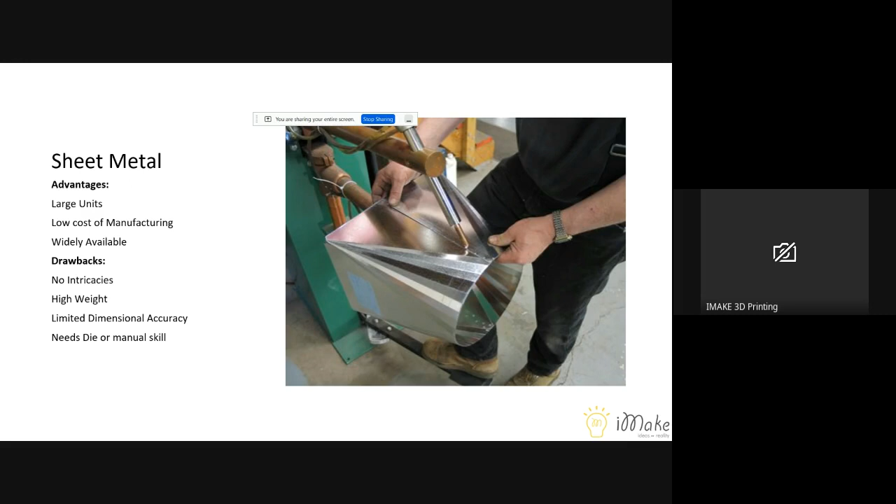Just to give you a very brief idea, to make a detailed sheet metal part you would need a punch and die, and that would typically have a pretty long lead time. Unless you really have large scale volume, it doesn't make sense to go for a sheet metal die punch. Sheet metal, forming, or even deep draws: many of you must have used metal bottles these days. They are deep drawn, made primarily using sheet metal.

And then you have CNC. It has very high accuracy. All of your watch components are mostly machined or done using CNCs. Metals, woods, and plastics can be done. The repeatability is pretty high, as in the first part and the 10,000th part will have the same kind of accuracy.

Your MacBooks are machined, the outside rim of your Apple iPhones is machined, and the majority of internal components in your watches or the engine heads in your vehicles are also machined. It is expensive even for mass production; unless you have very high volumes, it doesn't make sense to get it done through CNC machining, and the lead time is pretty high.

To get a medium complexity unit, the normal market time at the moment is anywhere between 6 to 12 weeks. In the current fast-paced environment, people don't have that kind of time, the reason being that product lives themselves have shrunk.

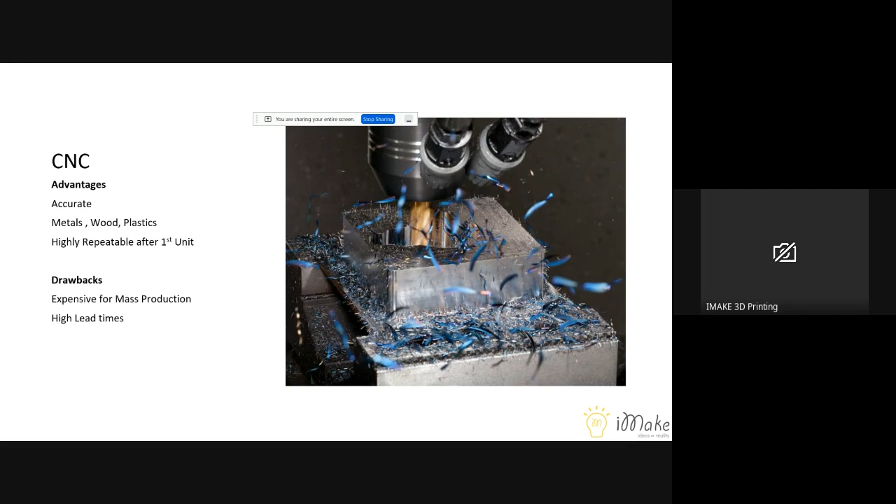I mean, most people these days don't use the same phone for more than 2 years. They don't use the same laptop for more than 4 or 5 years. The car is changing every 4 or 5 years. Now, if you add 6 months or 1 year of product development in the life cycle of the product, then the companies would lose a lot of time. So they will have to do things in parallel or invent new ways to deliver and reach the market faster than normal.

And then you have sand casting, which is also a very old method. Many of your large metal statues, some parts of your large jewelry, or even some components in automotive are normally sand casted. Like your base, the chassis is sometimes sand casted, mostly. Sometimes they're investment casted, sometimes they're laser cut, but there will always be a combination. So the advantage is you can do it in much smaller batches.

And by the way, railway components largely are sand casted. Many railway components are done in Hyderabad as well. If you go to the Medak area, there's a huge number of companies which do sand casting. The surface finish and the porosity are often a problem, and the initial pattern is still required, but the lead time is relatively faster because you're making it like a copy.

So you have an original part, you do it in wood or you do it with 3D printing, and then you make a copy of that. So the quicker way to do it in metal is sand casting. You can shrink it down to a 1 week kind of lead time.

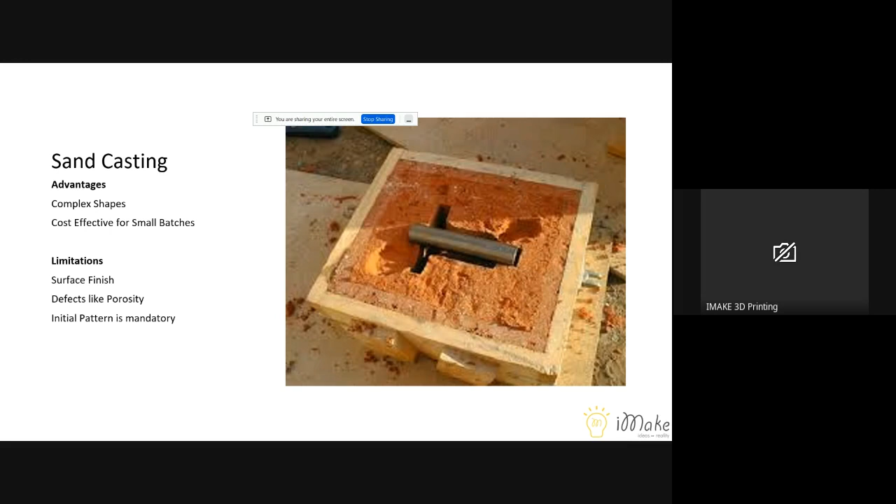And by the way, please don't hesitate to stop me at any point of time. And also, I'm not from a teaching background, so I would not be a good teacher. So please stop me if I'm going too fast or too slow.

And investment casting these days, okay, just to make it fun, how many women are there in the audience? Just to make it interactive, because I don't see people reacting. So how many women are there in the group? Approximately half of them. Hello. Yeah, we raised the hand. We are raising the hand, sir. Oh, you raised the hand? Oh, okay. Where do I see that? I'm new to this. Oh yeah, now I can see. All right, so good number. Okay, good.

So a tip for you: next time you go to buy jewelry, if the jeweler says that it is handmade, he's talking nonsense. He's just trying to trick you. 90% or 95% of the jewelry made currently is entirely made using investment casting, and the primary part is made using 3D printing. I've seen a couple of jewelry manufacturers in Mumbai and in Ahmedabad. They literally make thousands of models every single day. And the production cost in jewelry has actually come down after using 3D printing.

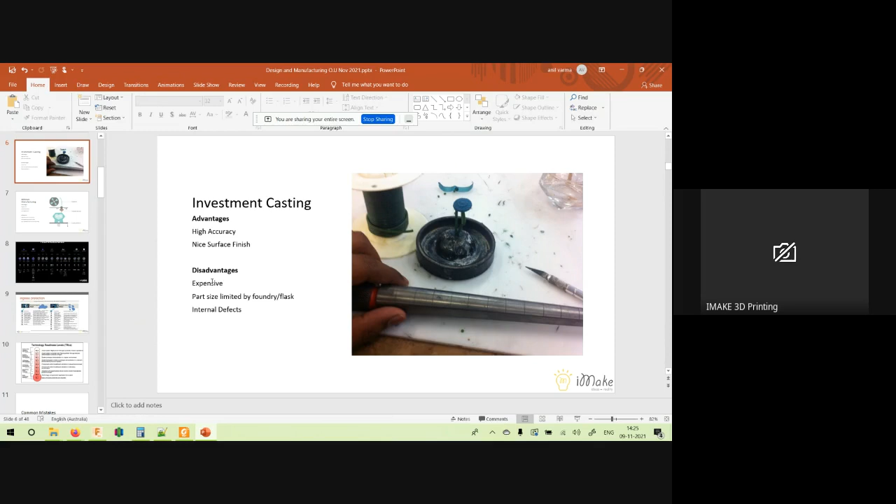And also, just to give you a reference, we do a lot of work for the Telugu film industry and a little bit for the Tamil and Hindi film industry as well. Much of the custom jewelry that they wear is also done using investment casting. And before investment casting, for example, the blue part that you're seeing where I'm pointing, this part is 3D printed.

And it's a very economical and very fast method: you design the part, you 3D print it, and then you make it using investment casting. In this case, I did only a single part because it was the first part. But typically in a single tree, you can make about 60 or 70 such pendants or rings in one single go. So this is used in different places. These are called motifs. So yeah, all right.

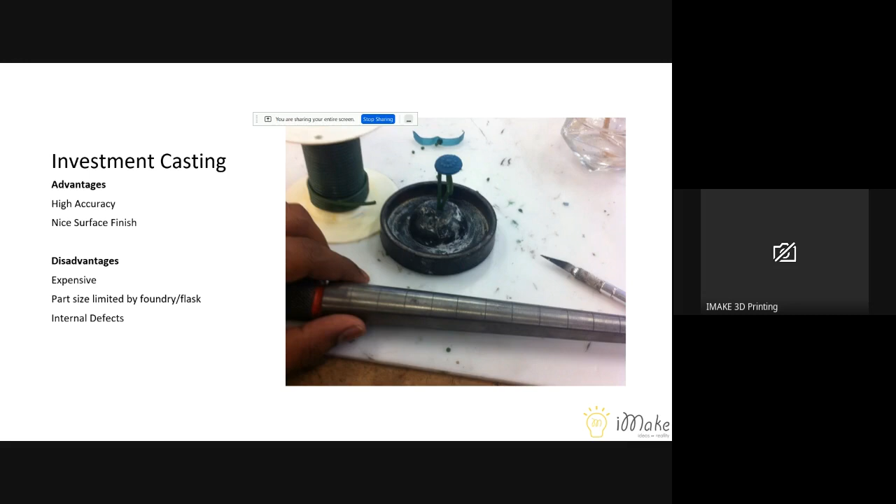And then you also have injection molding, which I'm sure most of the people must have seen, I'm assuming. And then you have additive manufacturing. Obviously you can do a single unit. For example, if you have 50 different designs to be made in a single go in a single 3D printer, you can do all 50 at a time.

And that is how 3D printing has been helpful for medical and jewelry, because it is many times customized and the orders are not bulk. And one more business advantage that 3D printing has given to the jewelry industry or medical industry is they don't have to maintain huge stocks. Because of the short turnaround times, the parts are made on order, and within a week you will get your part.

I mean, many of you must have used or heard of these dental implants or knee implants. Knee implants are nowadays being mass manufactured, but dental implants largely, if there is a crown or a custom thing, are being 3D printed using various metals. These are the two industries which made maximum utilization of 3D printing.

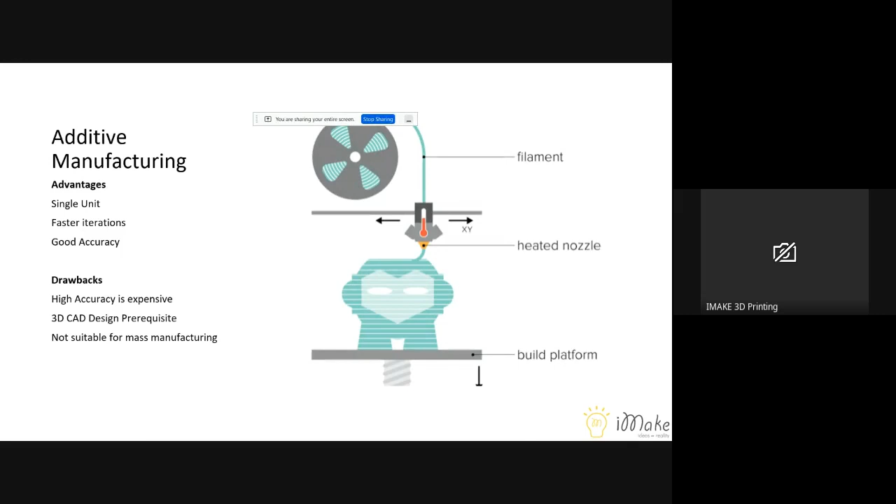These are the various 3D printing methods that you have. I'm sure you guys must have seen this a lot of times, but let me quickly go through the larger sections. You have something called VAT polymerization, wherein, to put it in layman's terms, you pour a liquid and the liquid is cured by a specific frequency of light.

When this specific frequency of light hits it, like for example, the machines that I have are 456 nm, the moment light of that frequency hits it, it becomes solid. So the light travels in the path of the object, and slowly layer by layer this gets cured. And you have DLP. In DLP there are various types, wherein there's a screen and you project an image onto the VAT, and that VAT layer, with the liquid, becomes solidified.

Then there is CDLP, which is a relatively new technology, but it is giving much faster results than the other two. And your entire jewelry or customized hearing aids are all made using VAT polymerization only. There is no other technology that these guys use. They always use VAT polymerization.

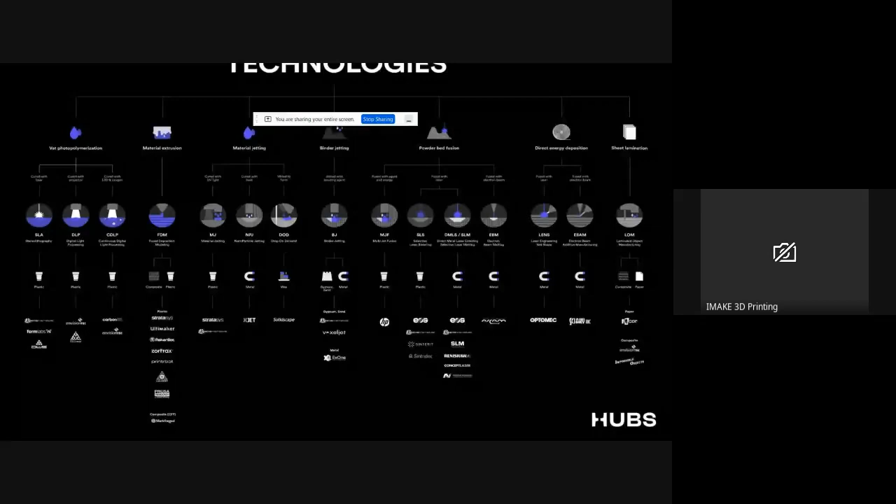Okay. So general things that you should probably know when you're designing, especially because you're from biomedical engineering or you do a lot of electronic stuff, is you should understand what ingress protection is, which I'm sure must be part of your syllabus or you must already know, but I'll just go through it again in a minute. Ingress protection is the protection that your phones or laptops these days are claimed to have, an IP67 or an IP56, which determines the ingress level. Ingress as in what can penetrate into the device.

Okay. Now, if you're talking of IP68, the first digit denotes the protection against dust. The second digit denotes the protection against water. That means if you're talking of IP50, it is dust protected, full contact protection against dust deposits inside, but it has no protection against water. If you're talking of IP08, then there is no protection for dust, but there is protection against water, which is a rare case, because if you protect against water, you'll by default get some dust protection as well.

So that's the reason in most cases you will see numbers from IP54 to IP68, because when you are protecting all sides of your equipment, whether it is biomedical equipment, electronics equipment, a phone, or even a toy, whatever you intend to make, it is supposed to be with this.

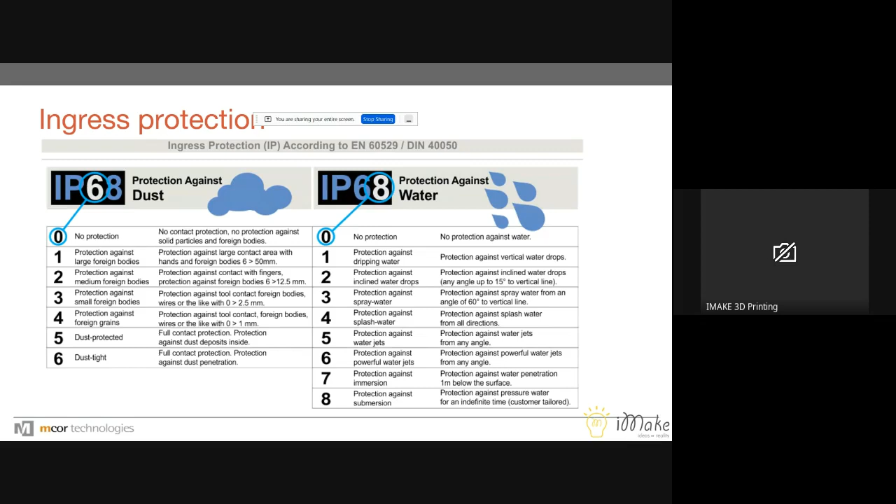What is our target market, and what is the compliance that is required in that specific market? That we should always be aware of. And then also knowing the technology readiness levels. This is a measurement used by a lot of European space research organizations and also a lot of R&D organizations in India as well. I'll just quickly go through this.

Many times with researchers, PhDs, or people who are doing a project, if you ask them how much is your project complete, the most frequent answer you get is a number: 60%, 40%, 90%. Is that a common phenomenon that you guys have also heard of? Yeah. Okay. At least I've heard that way too many times, so that's the reason I make it a point to communicate on this one.

What 60% is for an electronics development guy is not 60% for a firmware guy, and it is not the same thing for the database guy, and the mechanical enclosure guy probably is at a 0 level. So this measurement helps you compare against the standards and communicate within the team or across teams, as to what level the validation has been done and to what level the product is ready to launch. The sole goal of this is to launch the product.

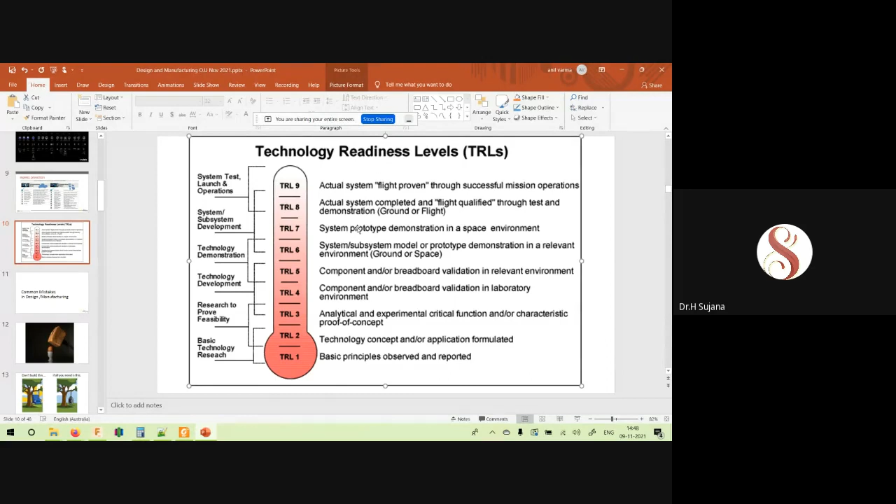Okay, right. This happens with almost, I would say, 90% of the customers that we have. And the beauty is, we tell them these are the mistakes that happen with 90% of people, but still people do that for various reasons. First thing is, whenever they're picking manufacturing, they have a hammer and they try to use the hammer for everything.

As in, I've known people who, for a simple timer circuit, build a breadboard and then try to get a PCB done, while the same timer circuit is available at 400 or 500 rupees in the market as a ready-made product. That is just one component in your entire system, but because you know PCB development, people try to redo that. And even we did that. I'll tell you in the case study. We are no exception.

And also people who have a CNC machine try to get everything done using CNC. People who have 3D printers try to get everything 3D printed. I'll tell you one funny example that we got.

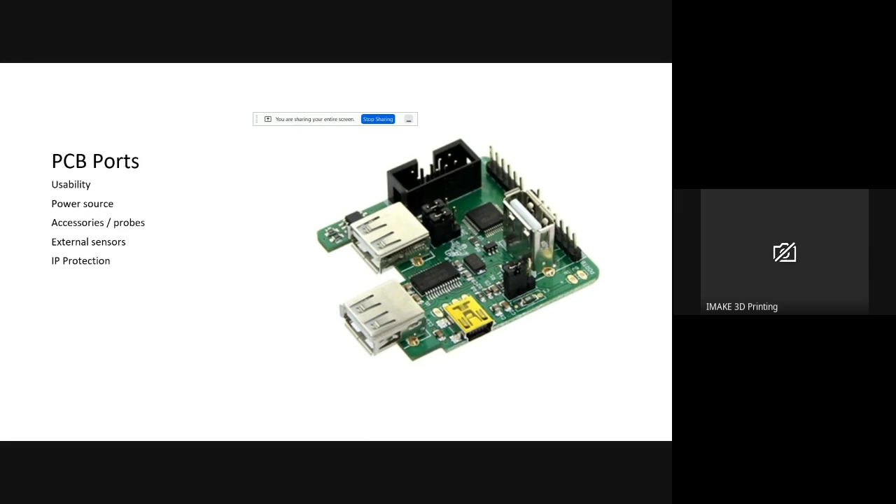And then giving the feedback, like for example, if the camera is working, then there's a small light, subtle thing, but you will notice that your camera is on. And then there's a magnetic feedback or a haptic feedback or an audio feedback. And always try to design your products idiot proof, like a SIM card. People will always misuse it. So you have to be smart enough to make your product idiot proof.

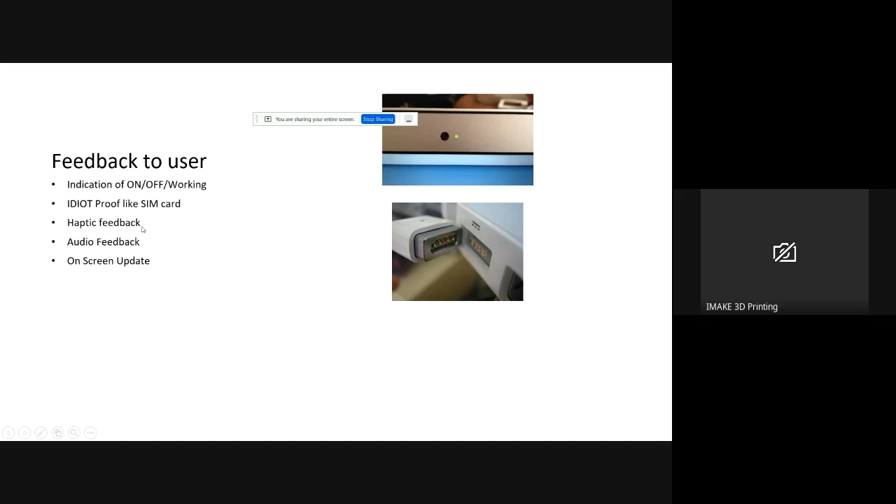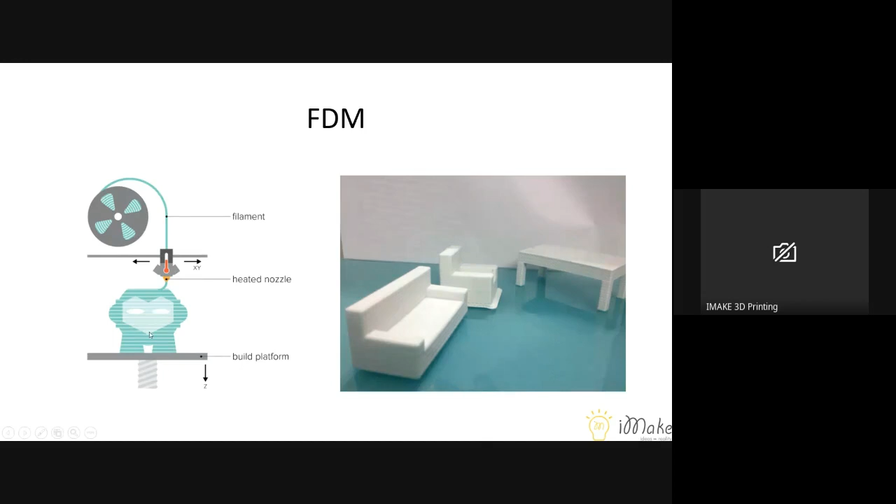Okay, and then within the technologies, I think I've already run through these things. These are some of the technologies that we frequently use here at iMake. FDM, which is using filament. The filament is heated and extruded, and layer by layer it is built. SLA, as we have talked already, the laser is shot here and then it's printed inverted mostly.

The new SLA method is brought by a company called 3D Systems, wherein the SLA is not inverted, it is straight. That is helping a lot with gravity. Because of gravity, whatever you're losing, the peeling off happens. So that is being prevented by 3D Systems. It is giving a pretty good output for SLA.

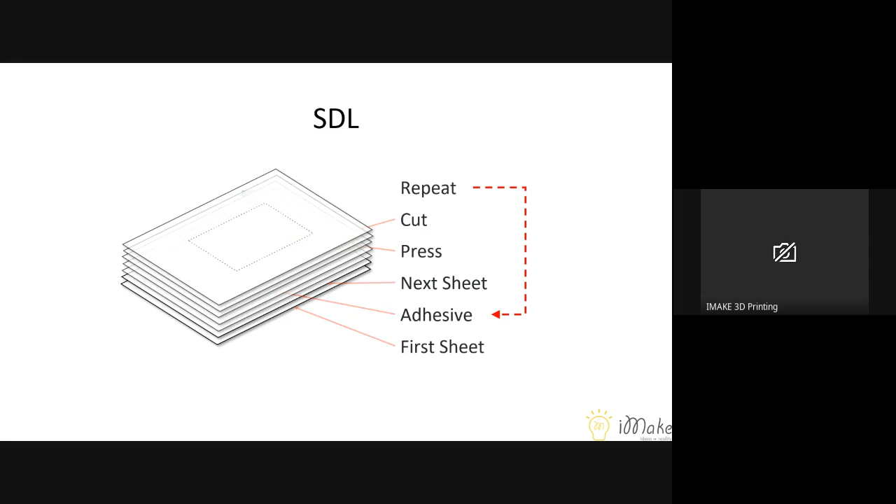And then DLP. Here an image is projected on a screen or using a regular projector, and the components are made. Again, the liquid is poured and the liquid is cured with light. SDL is, as I told, layer by layer, sheet by sheet, cut and repeated. This is almost on the verge of extinction because there are not many tools for this technology. The advantage is you can make full color products like this. We have this technology in-house at iMake.

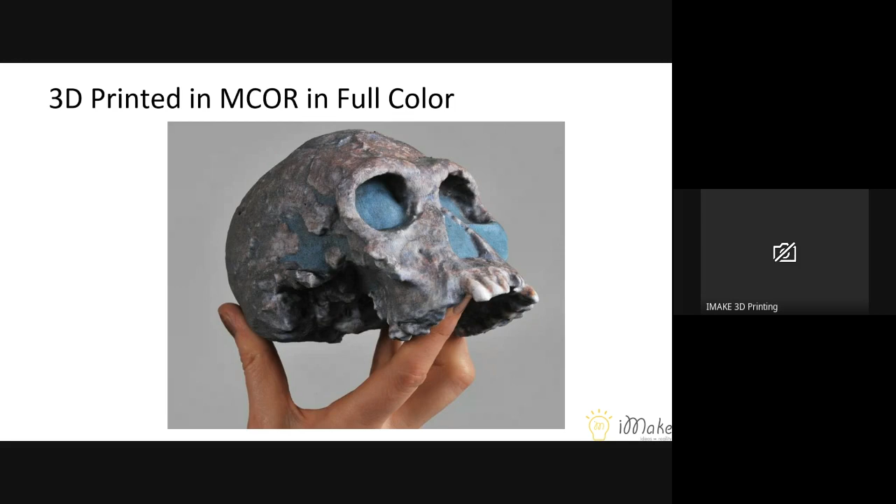And then you have composite fibers, wherein you can make very hard, very strong components, and for a very light weight you get pretty good strength. You can get aluminum-equivalent strength at probably half its weight. And then you can also do it with Kevlar. Kevlar also gives great abrasion resistance. Kevlar is a proprietary material by DuPont, and it is used in most bulletproofs.

Fiberglass: most of you must have seen the bodies of many buses, these FRPs, and most boats. They are made using fiberglass. So fiberglass can also be used in 3D printing. For these composites, there's a company called Markforged, which is almost a global leader in composites. I've been fortunate to visit their headquarters once in Boston. Pretty amazing parts they make, great strengths you can get, and the customization they offer is next to none.

If you see this component, I got this component done in front of me. The black part is carbon fiber, the white one is nylon, and these are threaded inserts. This is a bike brake pedal. I still have this component with me. It's been like 4 years now, but it's an amazing component, amazing strength that this company can give. So composites is one rare application.

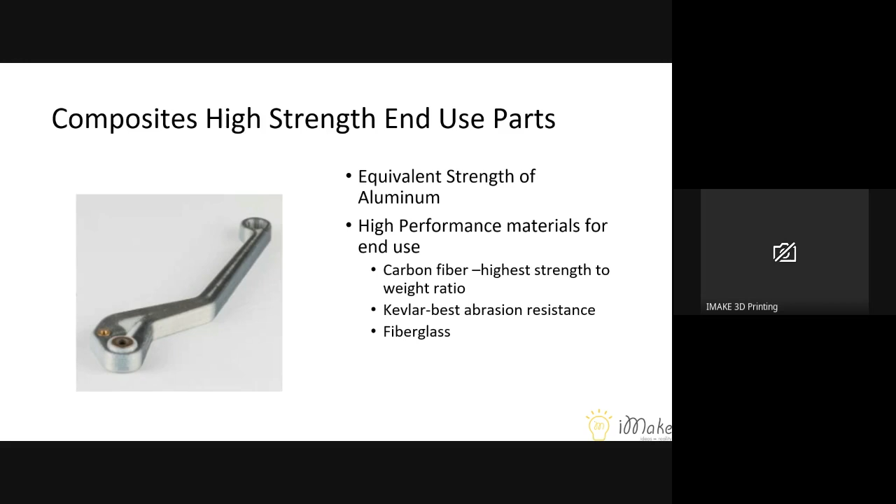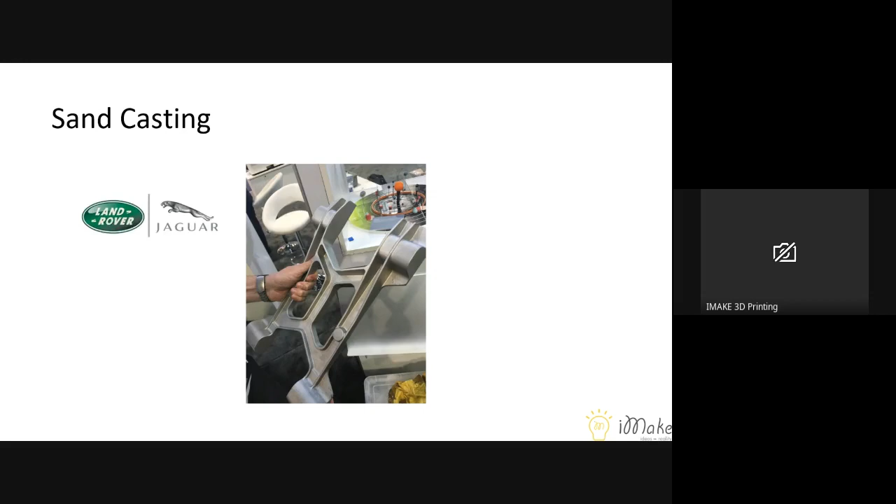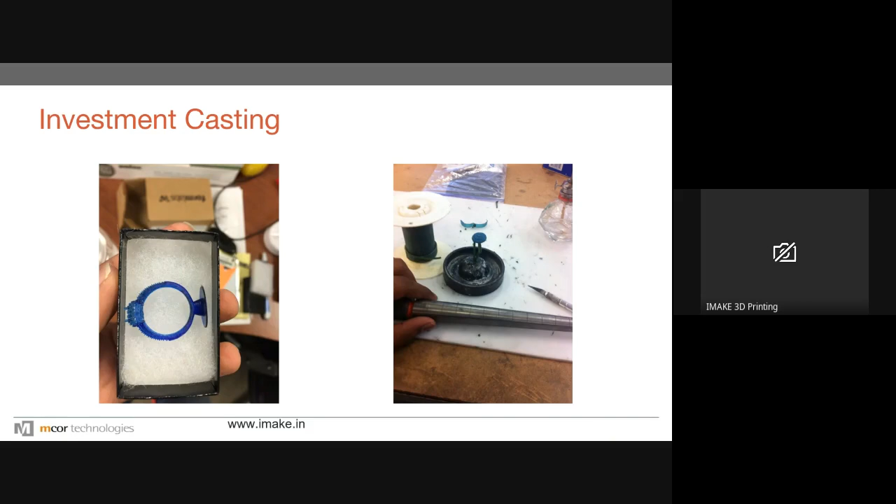Then you have investment casting. These are some of the jewelry that we cast. This was specifically for some custom use, antiques for movies and all. Sand casting also we have done. These are miniatures that we built. We built miniatures for the Hyderabad Metro as well. And these applications, I think you must have been bombarded by now already. So let us move to the case studies now.

Okay. Any more questions till now? Okay. We'll move ahead. All right.

Now, this is for making any product in bulk or launching any product. This is our standard process. We first understand the need, and then we make a design using CAD. Then we mostly 3D print because it is the fastest way to make. If something is readily available in the market, we use it. Otherwise, we 3D print it, or we do it using CNC.

And at this stage is where we go back many times to design or even to thinking. Like, for example, once you start making a prototype, you realize that this product won't work. Or you realize that this product is already available in the market at a much cheaper price, which you might not be able to match.

That is also an important aspect that you should consider, that you need to be constantly vigilant about what products are being made in a similar area, or who else is making this, at what price, and how they're making it. That is a critical component for you to launch a product, or launch a business rather.

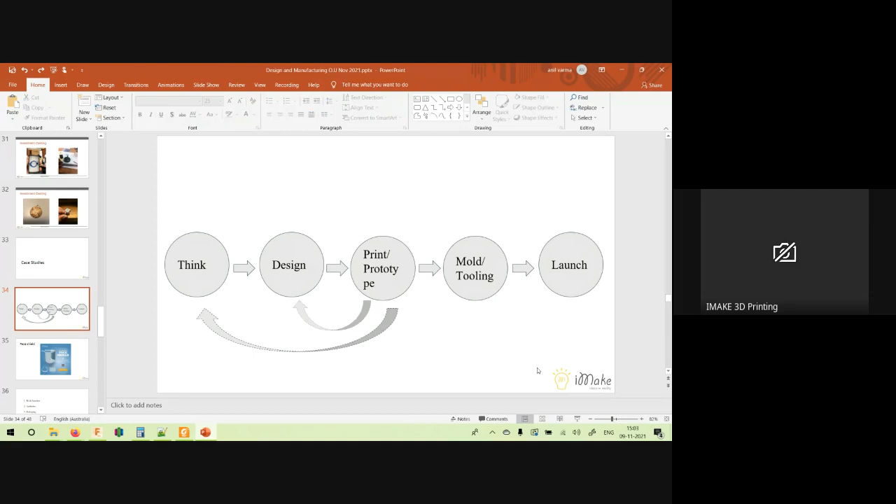Okay. And then let's move to the next slide. So when COVID hit, we got an opportunity to make face shields. Somebody asked me how much time from TRL 0 to TRL 9. This product, we took it in 6 days. In 2 days, we started the design and stuff, and then we started 3D printing.

I'll just walk you through the process. By default, whenever you're making something, you have to look at these things: the fit and function, the aesthetics, packaging, production, cost per unit. These 5 things are something that we need to check when you're moving a product that you intend to launch into the market. Okay, so I'll tell you what we have done at this stage. This is the design. Let me show you the design.

You guys can see the screen as well? Yes, sir. Yeah. Okay. All right.

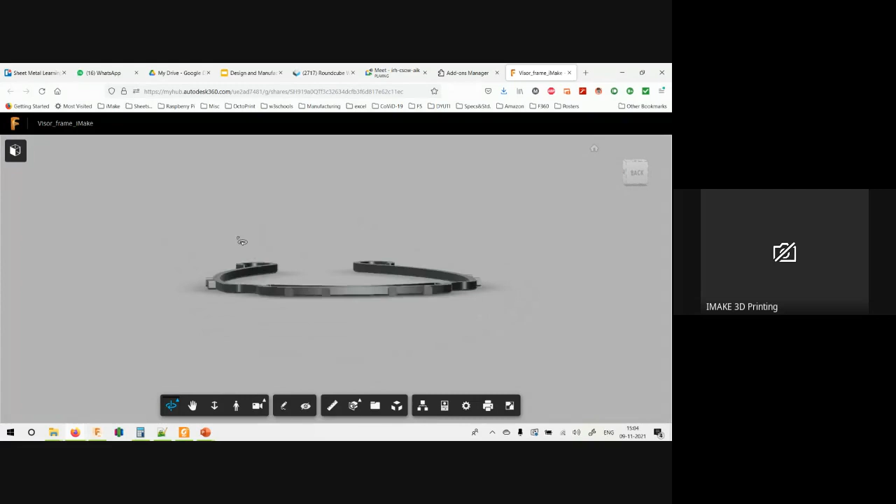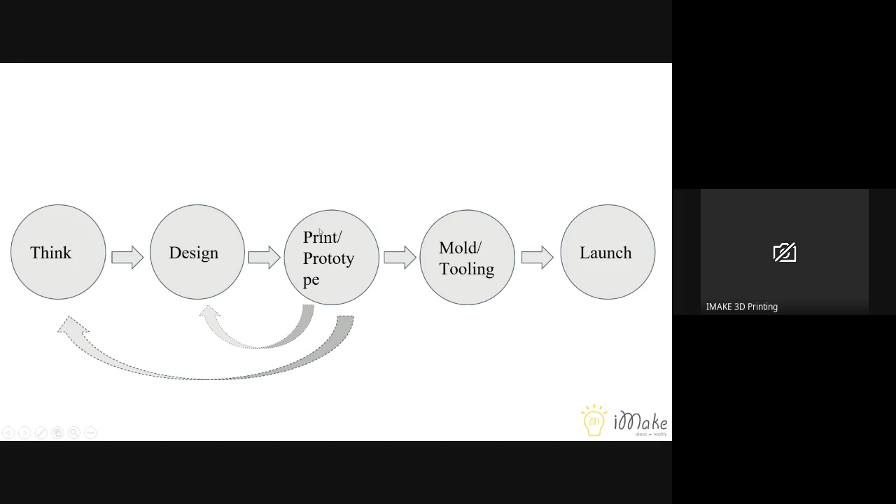Okay. So this is the 3D design that we have built. When COVID hit, the masks were in a shortage, and people also needed this protection because face shields are made using a non-porous substance. Because it's non-porous, the particles will not penetrate, and breathing is also relatively easy if you're using this. But many doctors use this as an added protection over their masks.

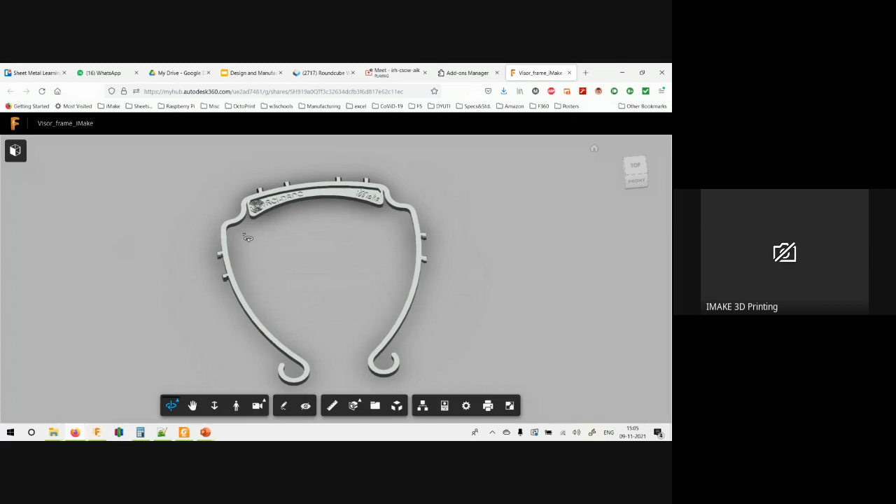Okay, now coming back to this design. So we made this design. Once we made the design, what do you check? We check the fit and function. The fit and function as in, does it fit the majority of heads? We tested with about 40-50 people whether it's fitting or not.

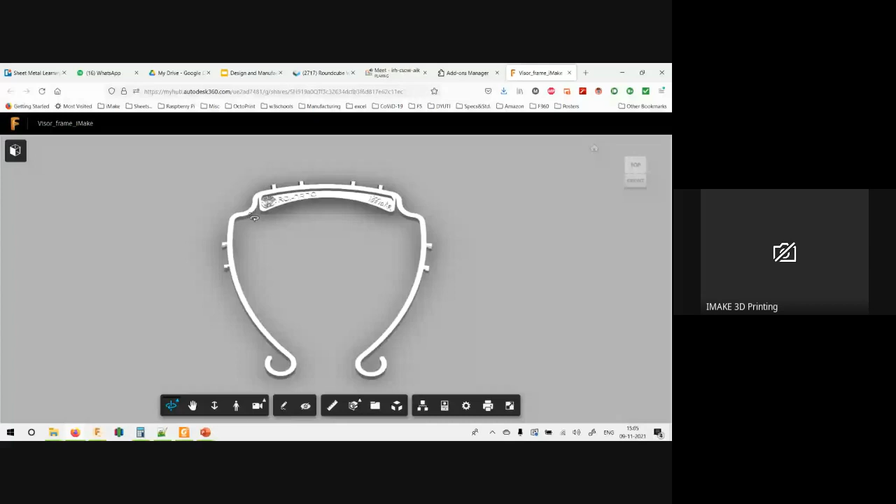And then aesthetics. Aesthetics as in, we wanted to have smoother curves instead of bulky pieces here and there. And these 2 points were meant to hold it by 2 fingers. Remember those days when we were afraid to touch anything? It was not long ago, so most of you must remember that.

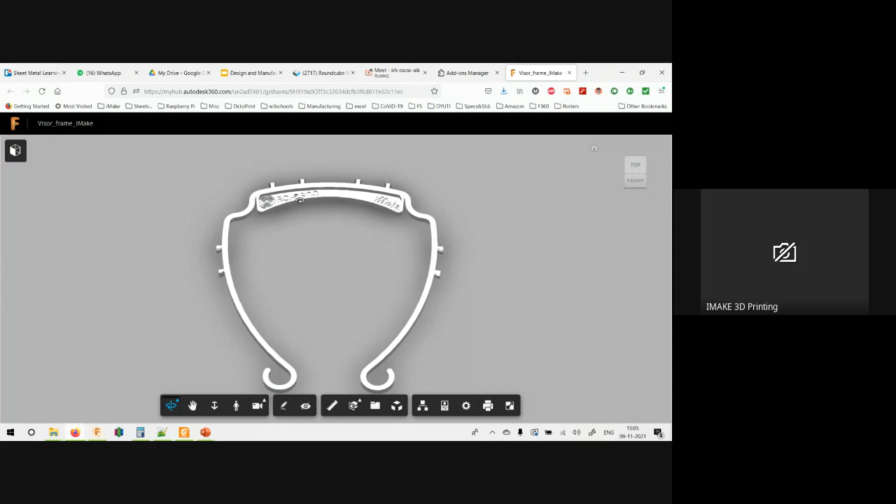And when you're talking of aesthetics, since it's our product, we wanted to have our logo. For example, if you see below this, we have something called Ideas to Reality in our logo. Now, while we were making it, the Ideas to Reality would fit here, but to do that, you'll have to decrease the font size. And to do that, the mold making would require a laser etching.

Since it was lockdown, the laser etching was closed. So we compromised on that. We took a trade-off on that, saying that we'll make the font bigger and just give our website. That will also help us in making the business.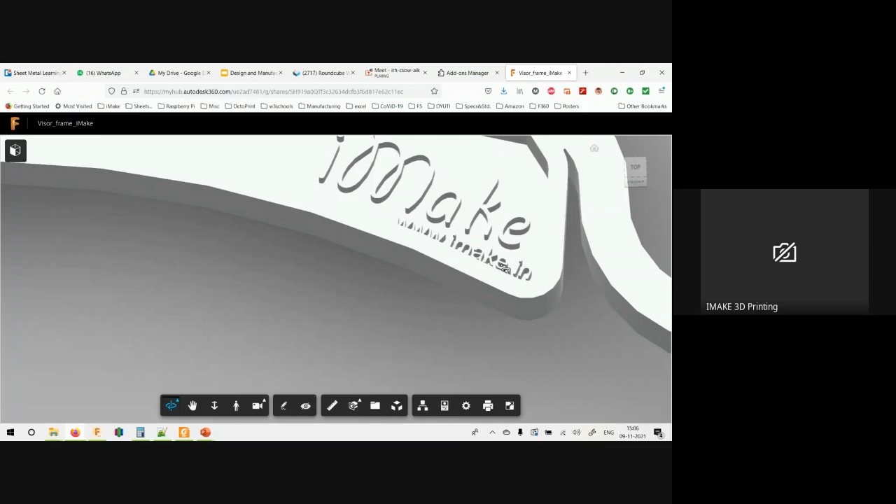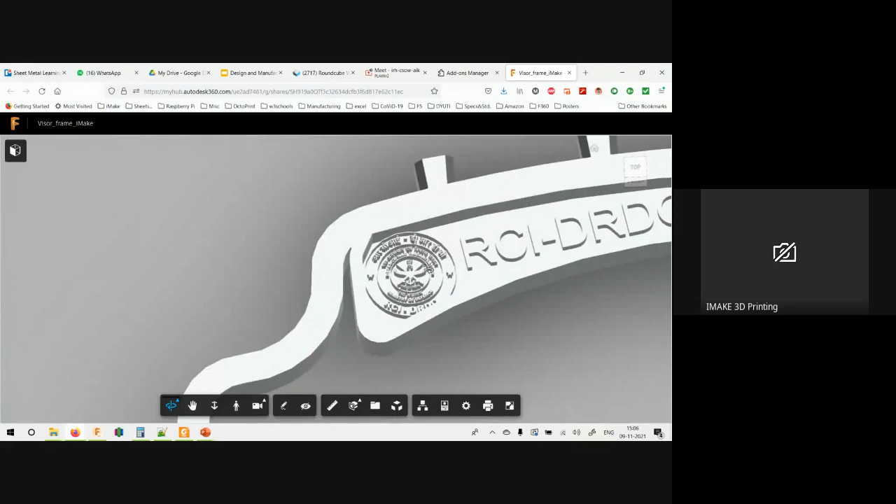Similarly, if you're looking at this, this logo didn't go into production. The RCI logo. This is a pretty complex logo. It looks great on the design. Even 3D printing can produce it. And if you have to do it on an injection mold, this logo alone will take an additional time of about a week. So we made a trade-off that we are not going to do this one. Okay.

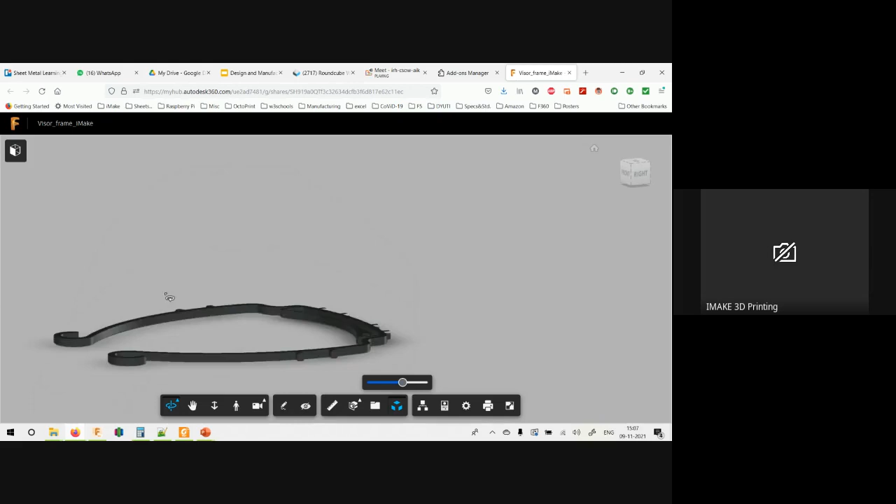Now, but we maintain the logo, the text on either side. Okay. And also, fit, function, aesthetics, and then packaging. Packaging as in, we want this to be as flat as possible. It can be packed, it can be stacked well, and it can be made into bundles of about 25 units each, and then given to respective doctors and hospitals.

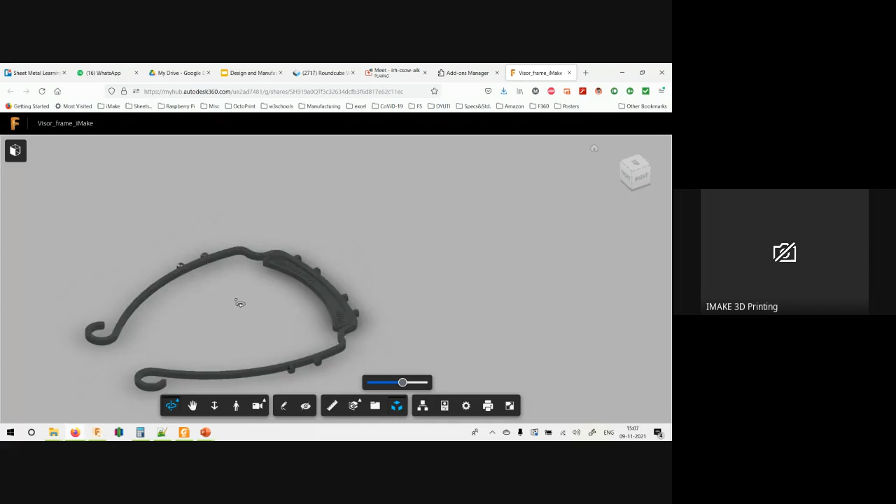And then we have to look at the production. Can this be made in mass production? So we made a mold for this, and the mold was able to make about 5,500 units per day. So once you get the mold done, there is nothing you could do because you could do only minor changes.

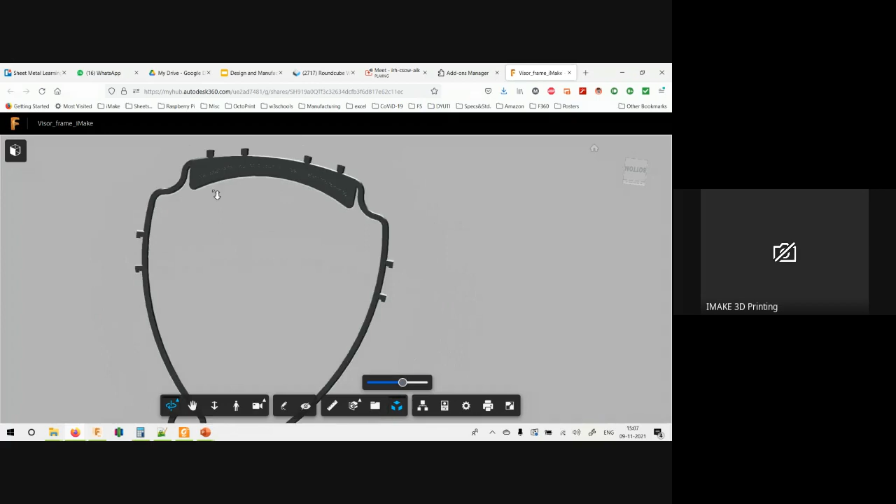And by the way, we got the text on the other side as well, wherein the government wanted to thank all the healthcare workers. So they wanted this: with thanks for your paramount service in defending mankind. So this they wanted it to be there. Now, and also cost per unit. Now, to reduce the cost, what did we do? The thickness initially was much higher, so we reduced the thickness a little bit.

Now, just to give you a context, this component alone weighs about 17 grams when it is made using injection molding, and it weighs less when you 3D print, because there are a lot of hollow gaps in there. When we calculate the 17 grams, in total, in the last 1.5 years, we made at least about 2 lakh units of this.

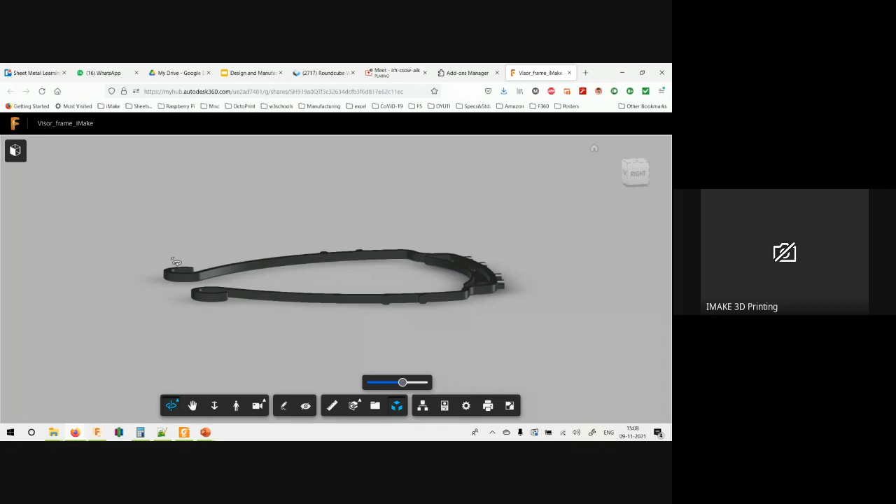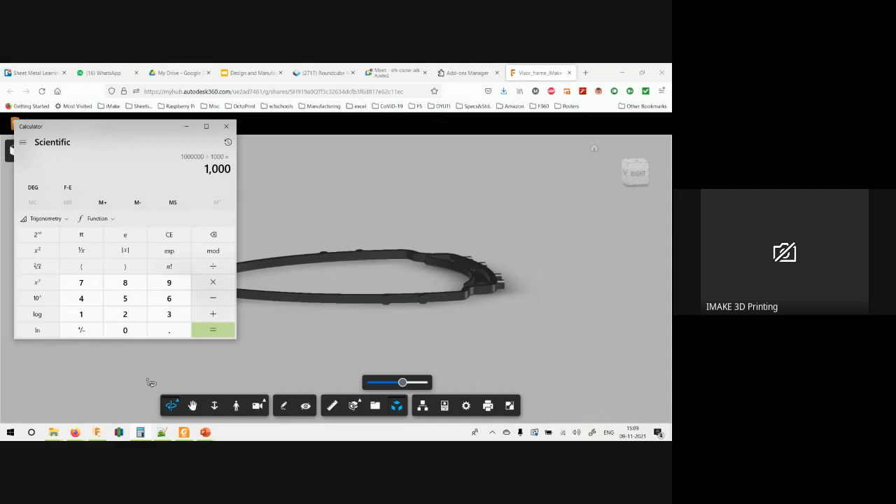Now, imagine if for these 2 lakh units, the weight is increased by say 5 grams per unit. So I'm talking of 1 million grams. So if I'm talking in kilograms, I'm talking of 1,000 kilograms, which is 1 ton of material which was not needed.

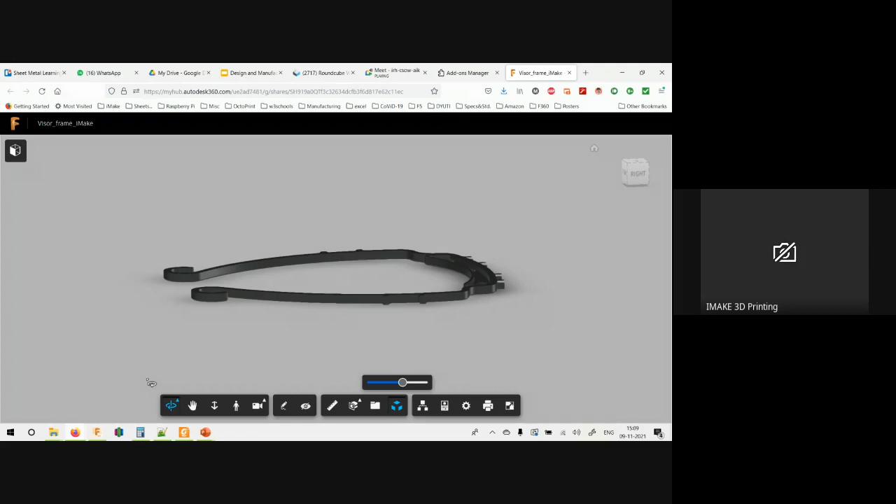So when you are going for bulk production, every gram that you can shave off, especially in products with injection molding, you really need to shave off every bit which is not needed. You need to shed all that weight. If you don't do that, your product becomes unviable. When there is no necessity, the obvious logic is you shouldn't be doing it. It will be an overkill. Okay.

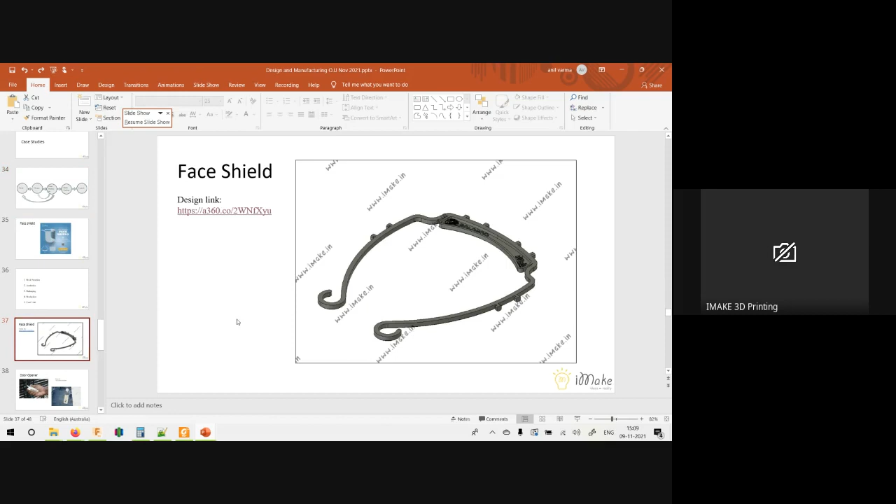Now, okay. So then we designed this. Now, after we designed it, there's another part of it. The other part of the game is how do you market it, how will you package it for customers, for institutions, and for international customers. We got some international orders, but we couldn't send them because our package didn't meet those standards and it was taking much more volume.

Had we planned this better, instead of 2 lakh units, we could have probably sold 2 million units. But we didn't plan that because of lack of experience or lack of knowledge. So that is one example. Any questions on this case study? We'll go to the next case study.

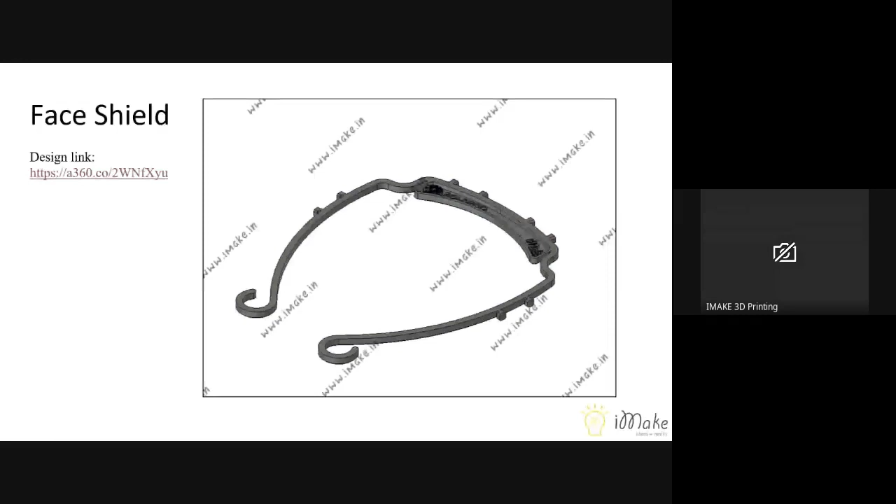We can move. Yes, Sudhir. What about the transparent sheet part? So the transparent sheet is normally taken care of by die punch, madam. Regular, like your wedding cards. Okay, I'll just show you that as well.

If you see this transparent sheet, ma'am, this is actually polythene sheet. We used projector sheet initially, then we used rolls. So there's a die punch. For example, in all of these fancy greeting cards or wedding cards, there is a typical die punch which is used in printing. If you go to Lakdi Kapul, the entire industry is that. So they were able to cut this one as well using the same method. They put a sheet and then they cut it manually.

Okay. So there is a die made with holes and these rounded corners, so it does not pinch. And the sheet that we use also varies. You can use a 100 micron thickness sheet. We can use 175. People have used 350 microns also. But we stuck to 100 micron sheet because we wanted this transparent sheet part to be disposable.

Because if you are using it, we are expecting that this has protected you and there is some virus on this. So we expect that to be thrown at the end of the day and then use another one. The thicker one, what happens is it's expensive and people tend to use it for longer time. And that defies the logic because you are carrying your virus with you into your home. It is like you're collecting everything that's there and then carefully taking it home. So ideally this is supposed to be rolls. That is how it was designed.

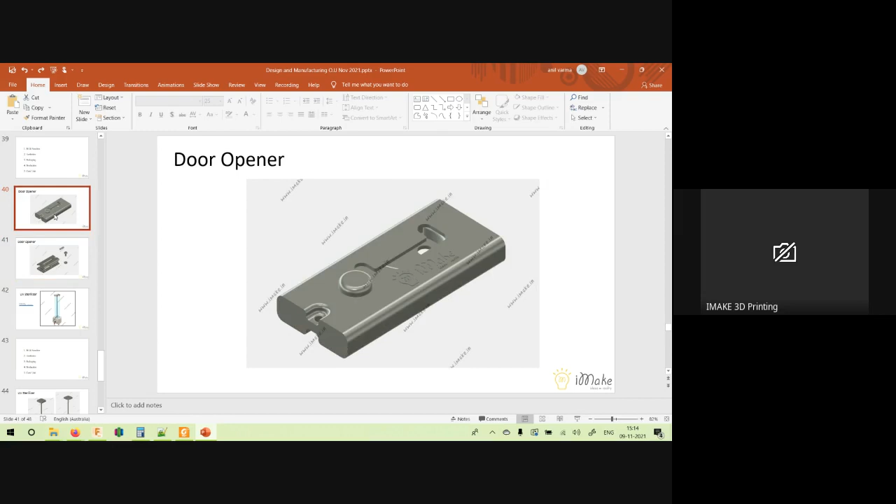Now I'll tell you the few challenges that we faced in making this one. Same thing, again, we checked for fit and function, aesthetics, packaging, production, cost per unit.

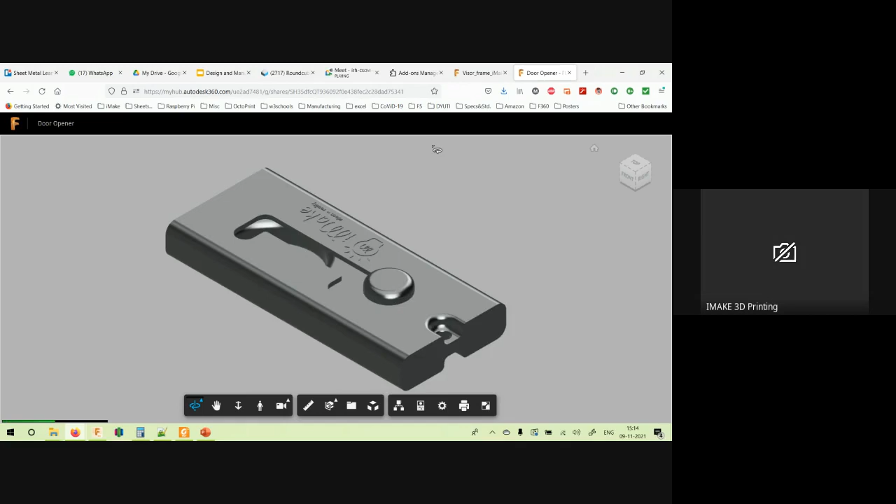Okay, let me open the design link for you, so it's easy. You can see the design now. So I'm just giving an exploded view right now. You can see the exploded view, everybody? Yes, Sudhir.

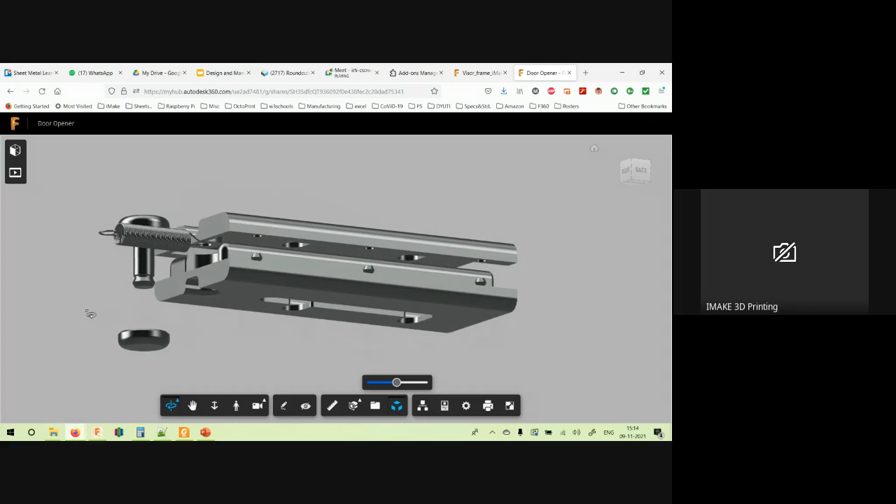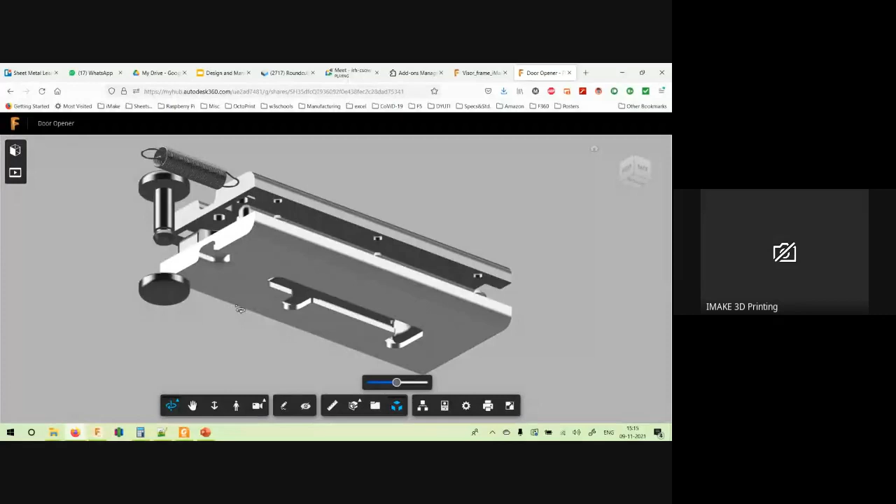Now this is a little complex design. If you see the previous one, it is a fairly simple one. It just had one injection molded component. And also the need was so high at the time, we were even 3D printing simultaneously and giving the face shields. Now, by the time we started making this one, people got a little bit relaxed, and the complexity of this product increased a little bit, as in it needs to be spring loaded.

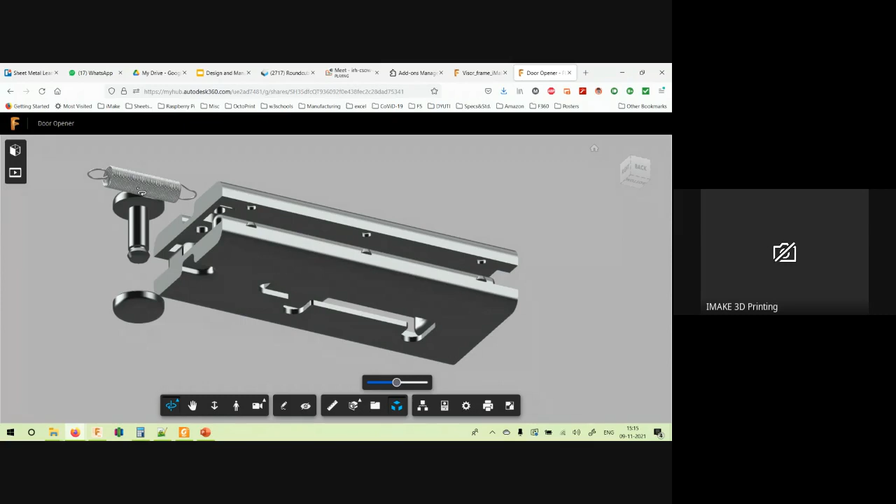Now, when it's a spring loaded one, how do you choose your spring? It doesn't have to be too strong that it hits back or it's difficult to move forward, and it also has to be corrosion resistant, because you're going to wash it or use sanitizer on it. People were throwing everything into sanitizer and bringing it out. So we got corrosion resistant metal wires, the spring steel, and then we made the springs with that. So we loaded the spring inside.

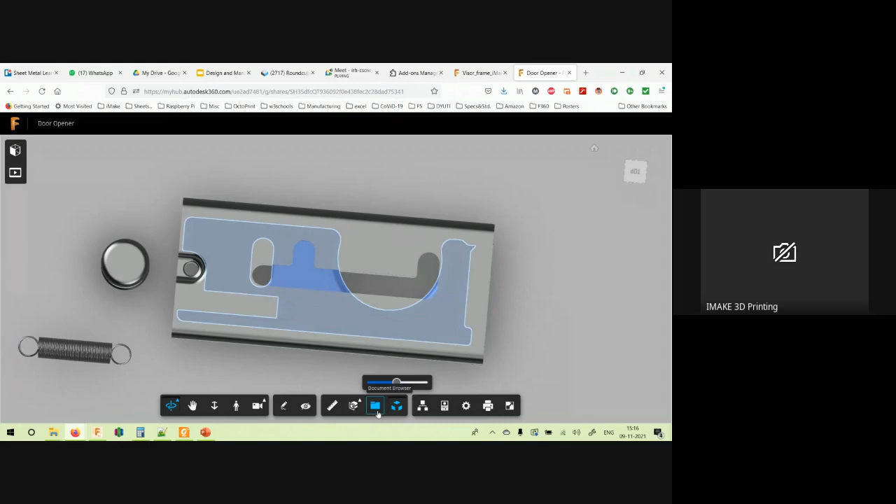Now, if you see the number of components here, you have 1, 2, the one which moves inside. And by the way, this sharp one is to open the packages, this one is to hold, and this one is to press the buttons. This is a different injection mold. This is a different injection mold. These two are one set. This is one set. So 1, 2, 3, 4.

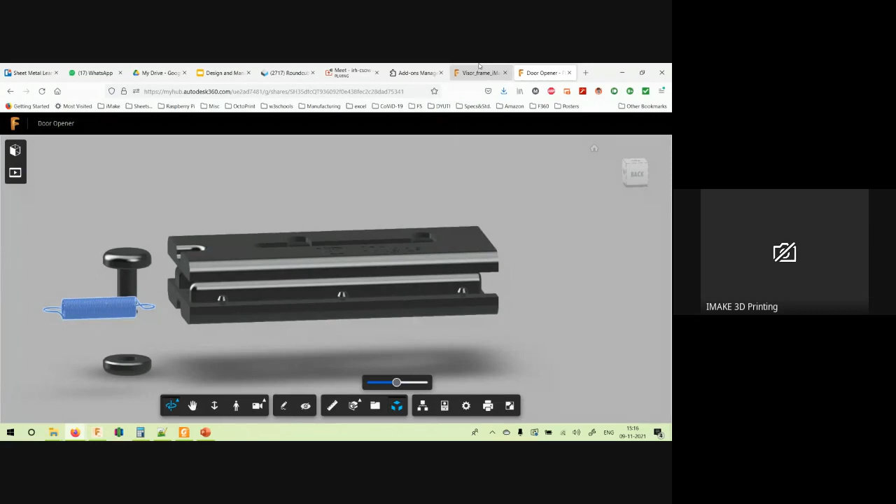4 injection molds, one spring being made customized for you, that too with the corrosion thing. So this one took more than the first injection mold to be ready. It took about 31 days. And yeah, I'll show you. If you see this one, this is entirely 3D printed.

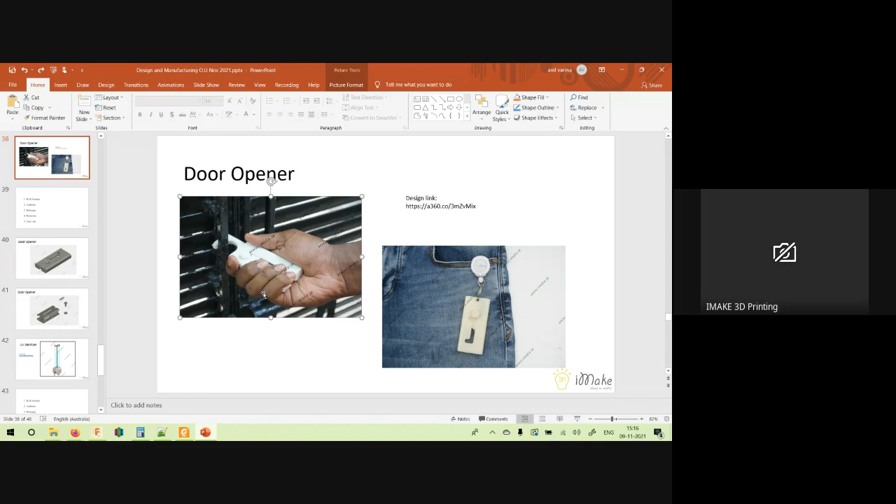This is injection molded. Obviously, this has great finish, but using this, we made the design, we refined the design much better, and we also were able to test and see if the product was working. It was able to cut the packages, it was able to open the doors, does it have enough strength and all that. We were able to test using 3D printing, and then we moved. Once we made injection molding, we were able to make about 1500 units per day.

Again, same thing. How do you check the fit and function? Fit and function, simple logic. In this design, does it fit the pockets? Does it fit the jeans pocket inside? Okay, and whether it's giving the function. And then aesthetics. Aesthetics as in, does it have proper round corners? Does it hurt? Or when you're pulling something, if it's sharp on your hand, that might hurt you. So those aesthetics have to be taken care.

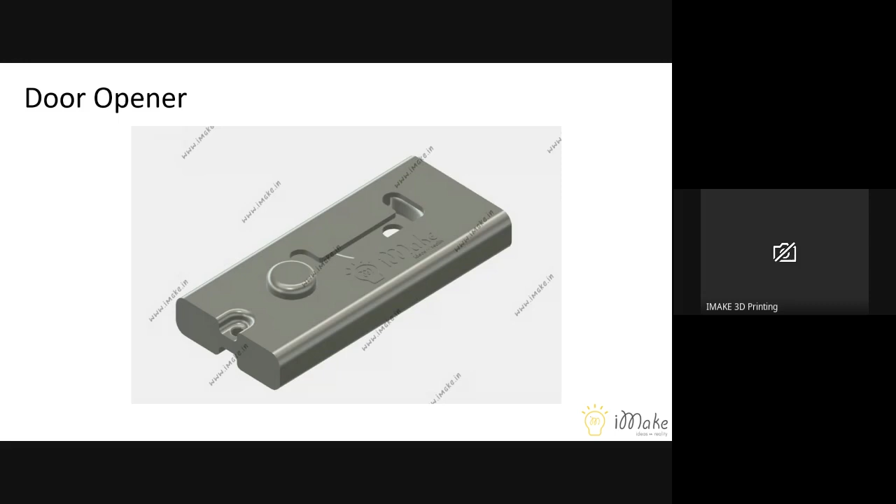These also have to be good rounded corners. And this is supposed to be, to make it easy to carry, we wanted to make it like a keychain. So that's the reason we are able to wear it like this or use it as a keychain with a ring. And then packaging, since we learned a little bit of lesson from that. So for packaging, I'll just give you an idea. For example, let us say you're doing a cardboard packaging or a blister packaging, like your tablets. The papers or the sheets that the packaging industry uses, they are of the standard sizes.

What happened while making packaging for this one is the outside box. Just because it was about 4 mm higher, we were getting about 8 to 10 units lesser for each sheet. That is increasing the cost significantly. So when you're designing or launching a product, you have to plan in all the directions, your actual component inside, the function, and all of these things at the 3D printing and design stage itself is where you will have to consider those things.

If you don't consider, you will lose a lot of market like we did. And by the time we did, people who are good at that, they copied this design and sold it much faster, especially face shields and this stuff. Okay. Again, production and then cost per unit. Cost per unit, as in, for example, if I'm increasing the size of this one, the same logic applies. Even if I'm increasing it by a few grams, it increases drastically. So you have to multiply by, say, 1 million units or 1 lakh units, then you will realize what is the cost per unit.

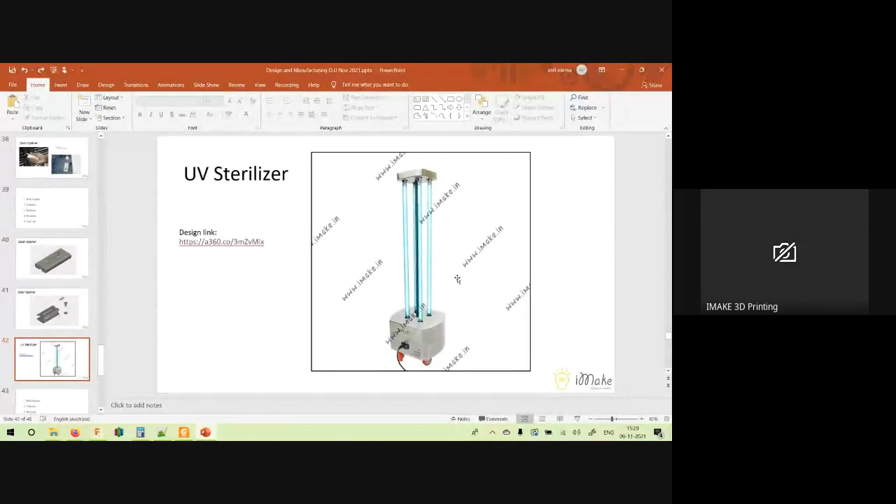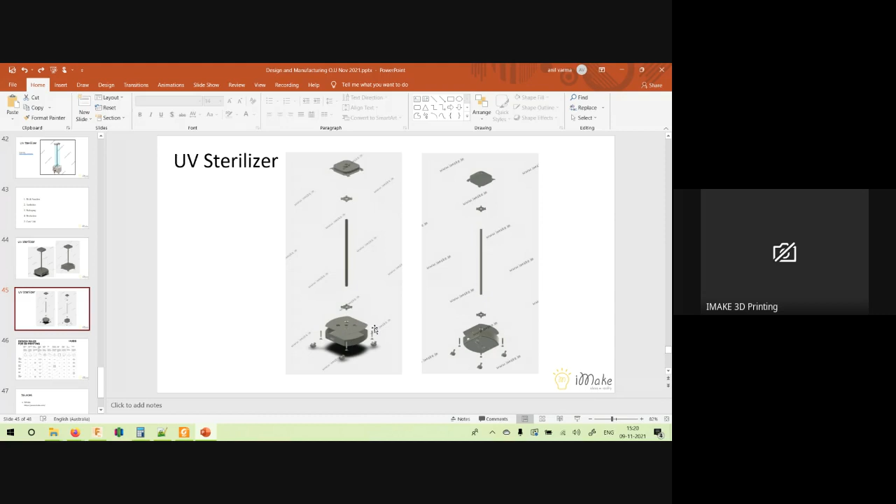Then we made a UV sterilizer. The complexity level is much higher in this, and here we have chosen to use entirely a sheet metal system because it is supposed to be in a sterile environment. The UV sterilizer has much more complex components, as in it has literally about 110 components inside it, if you include all the screws and everything. And this has these 4 UV lamps. I'll tell you two instances wherein it delayed this project drastically. The number one is,

how many of you have a tube light in your room right now? Many of you must be having a tube light. You will never realize until you hold multiple tube lights together that all tube lights are not of the same length, even of the same company. They vary by plus or minus 5 to 7 mm. Now, the disadvantage of that is when you're mounting them vertically, you cannot have a fixed base below. You need to have some flexibility.

And that is the reason why tube lights have those metal flanges on the edge, wherein it can move out a little bit. That means it is planned for the minus 5 or minus 7 mm. When you push that and then twist it, it can move by about 10 mm, 5 mm on each side. So it can fit the tube and still have the contact points. For us to even realize this point, it took us quite a lot of time. And that delayed the product launch almost by a month.

And then, remember I told you that people, just because they can build PCBs, they will build. So we did the same thing. All we wanted here was a timer to switch on the lights and then turn it off. But what we did, during lockdown, we put pressure on some people and got the PCBs manufactured and got it done. But then we realized the components were not available.

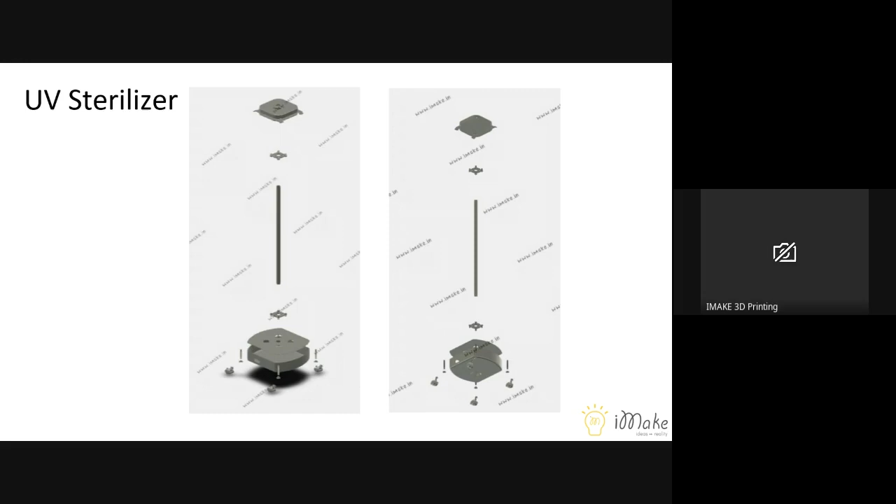And this unit has a lot of 3D printed components because it's not being bulk manufactured. It is made in very small quantities. It is made in sheet metal because steel is trusted; it can be cleaned properly and sterilized properly. And anyway, there's a light that's happening. We need a non-porous and long-lasting material, so we picked this one. For aesthetics also, we wanted to make it look good, a little futuristic.

And if you see the labels, we got them done using laser etching, the CE certification and all that. We used laser etching because laser engraving lasts forever. Stickers will go away quickly, but this will remain forever. Any questions on this one?

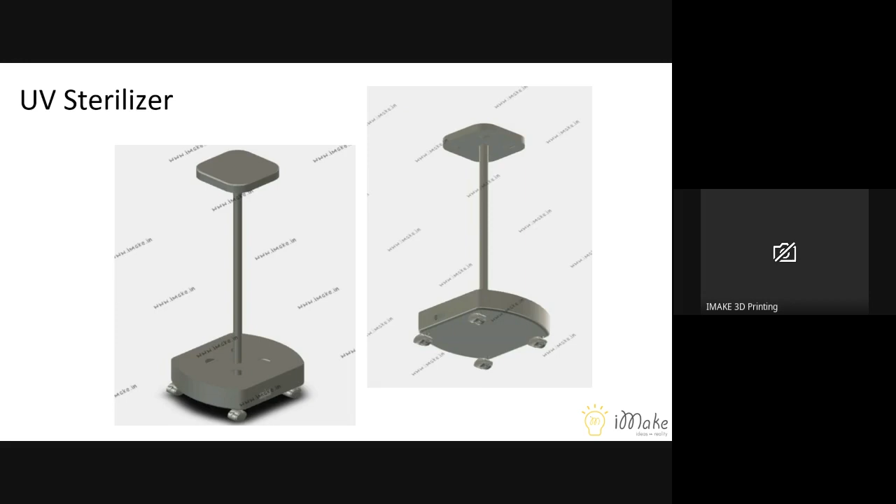Okay, I'll share this one. These are general. Also, when you're designing and 3D printing, it is very important to know what 3D printing technology you're using and what that technology cannot do. I'll give you just 2 or 3 examples because I've exceeded my time, I believe. You have 15 more minutes, no problem. Okay, all right.

If you want something lesser than that, you will have to go with SLA, stereolithography. If you want, let us say, an unsupported wall, the 0.8 mm again is the lowest thickness that you can go. Now, these are the things that you need to consider while building the product and also while designing.

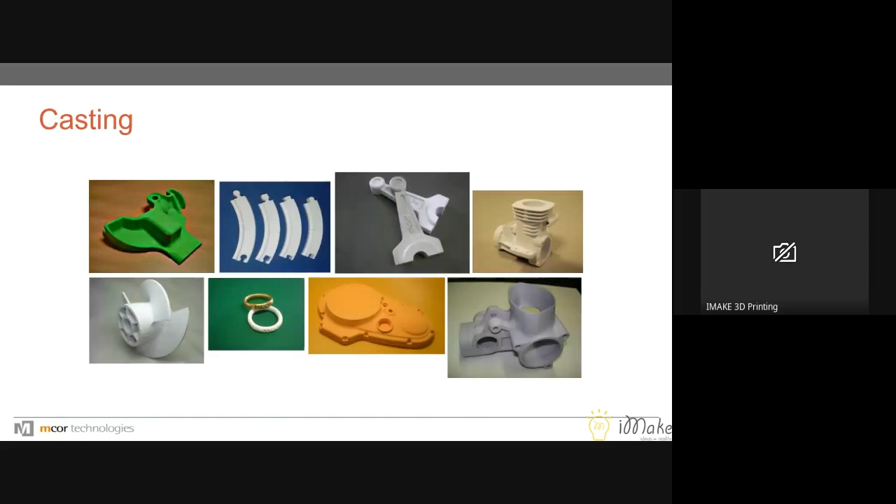That means while designing itself, if you go back to our TRL slide, you should know whether you are designing for TRL 3 or whether you are doing it in the actual TRL 7. That means if you are doing 3D printing, there's got to be a minimum thickness that you have to allow in the design.

But if you're going for injection molding, you can lower that thickness because that will save you money in the long term, and because injection molding is much stronger for the same material, you can afford to lose a lot of weight in injection molding. So you need to have this clarity as in at what stage you are and for what you are designing.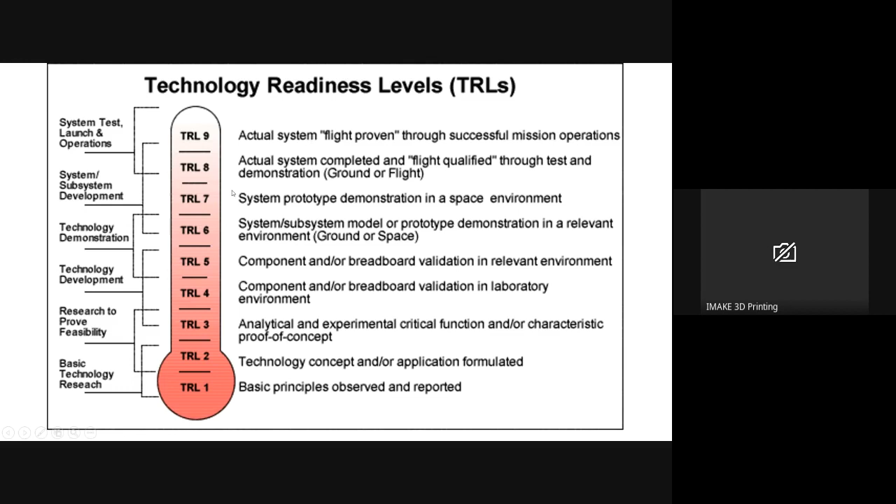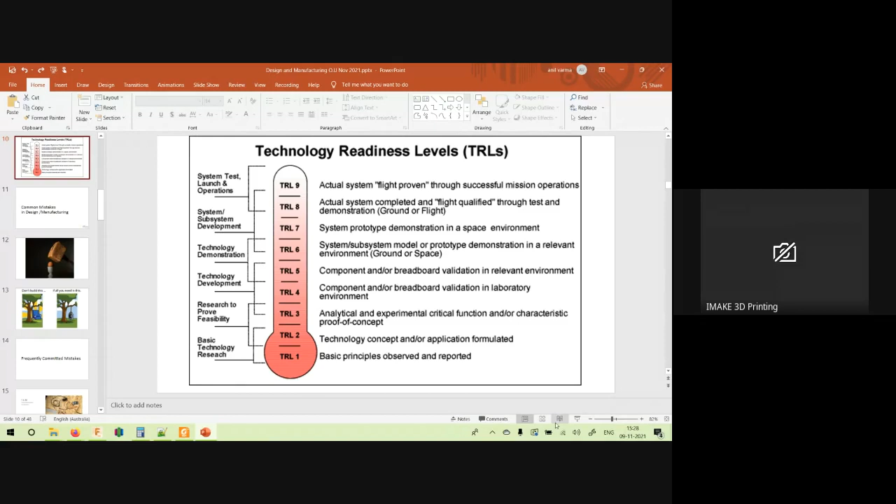If you're designing for an SLA, this is nothing but what people are calling DFM, design for manufacturing. Okay, we often face this problem with the film industry, where they use mostly Maya or 3ds Max, wherein models are not designed for manufacturing, they're designed for display on the screen. Now, if you take that care, your iterations will be much faster and you can leverage 3D printing and designing to the maximum extent.

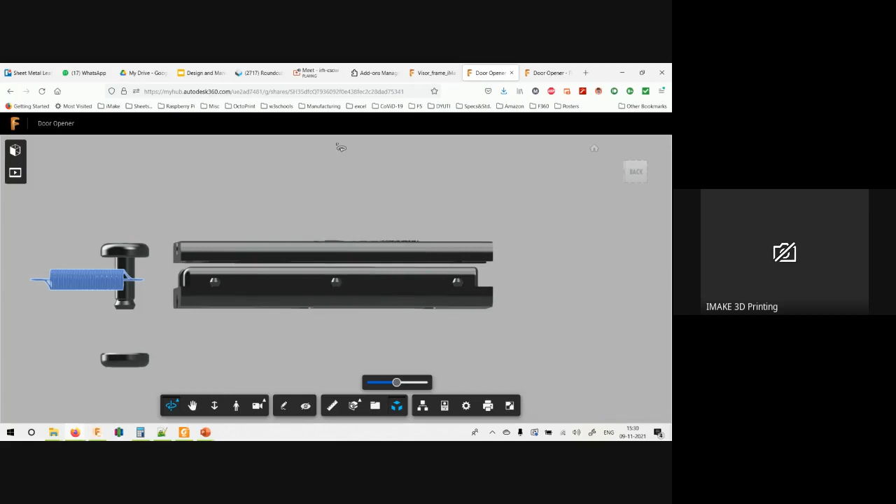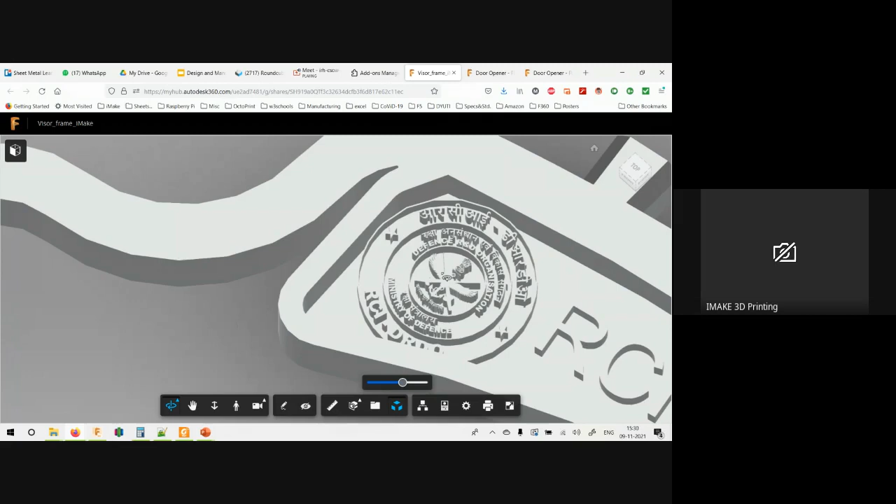You should also mention which direction you need good surface finish, because based on that, they will place the object on the 3D printer in that direction and supports on the opposite direction where your finish is not critical. Again, remember we talked about embossed and engraved details in our face shields design, which is this. This is an embossed design which was not possible at the time. So we made that compromise. We made the design, realized this cannot be done, and dropped the idea. We took the trade-off decision that this will delay the whole project, so let us drop this off.

So again, embossed and engraved details, 0.6 mm wide, 2 mm high. Whether it's lower or higher, this is the minimum. Horizontal bridges, that means printing without supports, the maximum is 10 mm, and all others cannot do it except DMLS. And holes: the hole diameter for a successful print is 2 mm. Connecting or moving parts, what is the clearance? 0.5 mm. Escape holes.

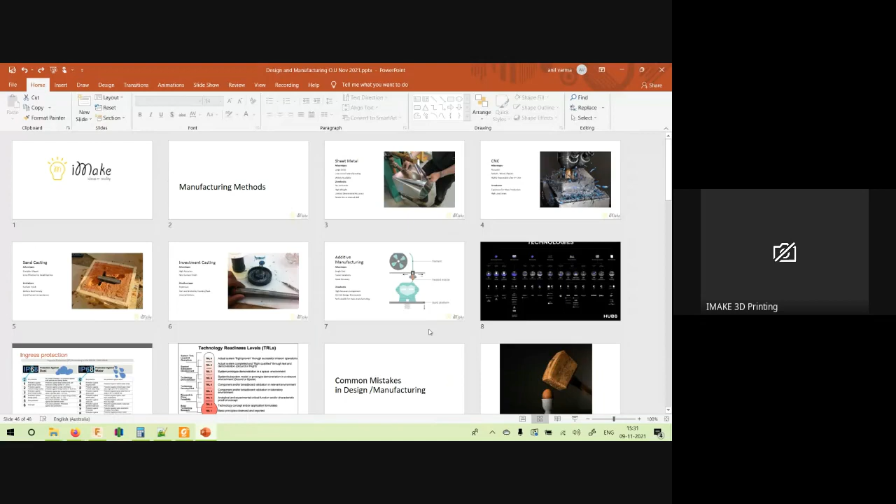Escape holes are not relevant in FDM because they are relevant only in liquid-based or powder-based systems, where the loosely unbound powder or your liquid needs to escape from inside the part. I'll show you an example. Oh yeah, this one. If you see this product, there is a lot of intricacy in this jewelry, this bracelet. If you don't orient it properly and don't give escape holes, the material will remain inside and it will not get cured.

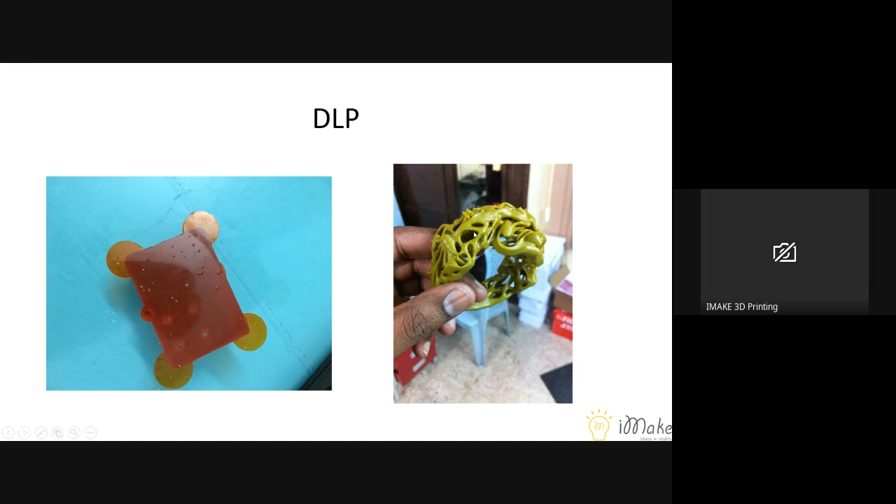And remember I told you there is a gravity factor also. Because it gets printed upside down, if there's a lot of weight, this might fall off because you're trapping uncured liquid inside, and that also tends to vibrate or move a little bit. That will also give you a very bad finish. So when you're planning this design in SLA or any liquid-based polymerization system, you also need to plan how your material is going to escape.

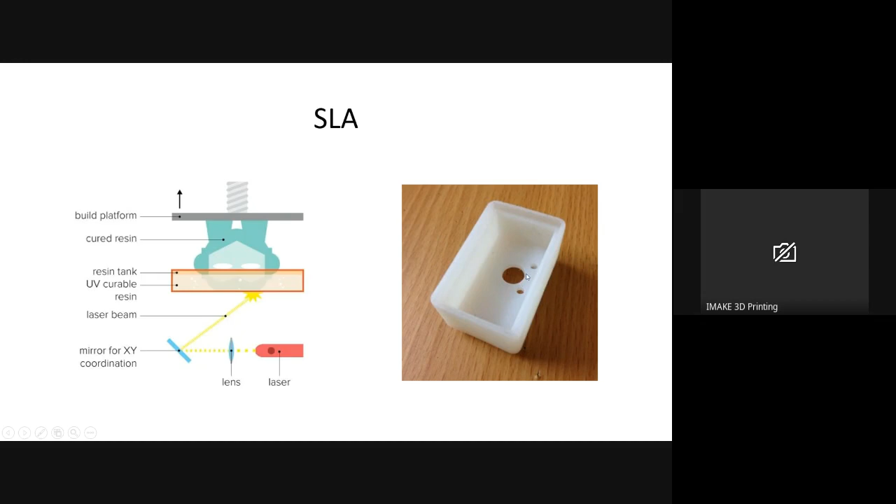If you see this part as well, this is also made in SLA. Because we needed greater finish on the inside, we had to print in this direction and give these two drain holes. Okay.

Okay, and then pin, as in the minimum diameter pin that can be printed. Let us go back to our hook thing. To get this pin printed, we need to identify what thickness is required to actually hold this whole thing with the required strength. Because we wanted to move a 100 kilogram iron gate, we need that kind of strength. So we had to have a minimum thickness, but if you decrease the thickness, this will break away.

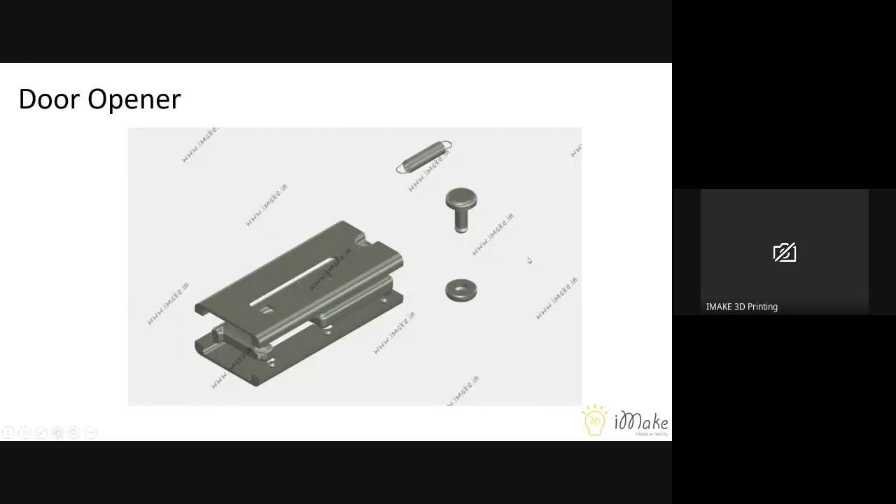Right? Tolerance, as in, again going back to the same model, there is a movement here. If you see inside this part, I'll go to the design part, I think. Okay, if you see this one, these are very tightly bound. Okay, this moves inside. Inside this, there's got to be a tolerance. So what is the tolerance required?

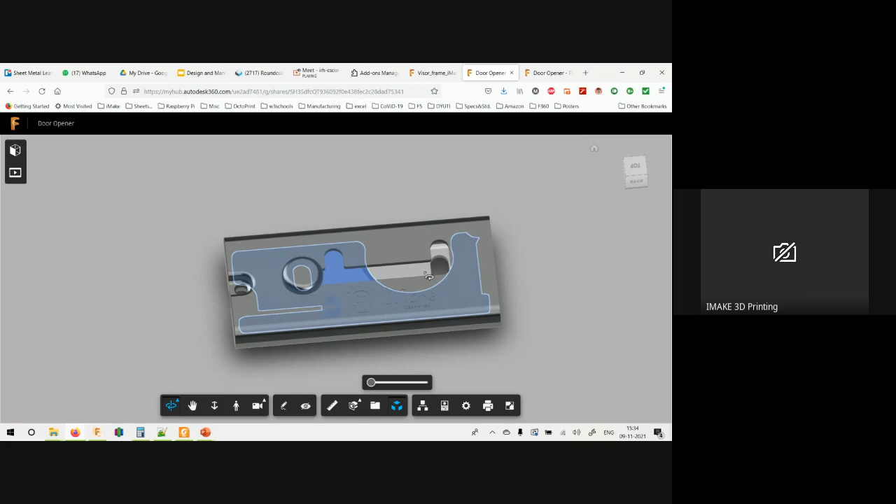For injection molding, it is different. For FDM 3D printing, it is different. For SLA, it is different. For each one of these things, it is completely different. So these are the various numbers that you need to keep in mind, and various technologies which you might be using.

And these limitations are critical because without them, what most often happens is the designer blames the 3D printing team or the prototyping team. The prototyping team says that the designer does not know how to design for manufacturing. So if you don't have this in sync, your project will go in circles.

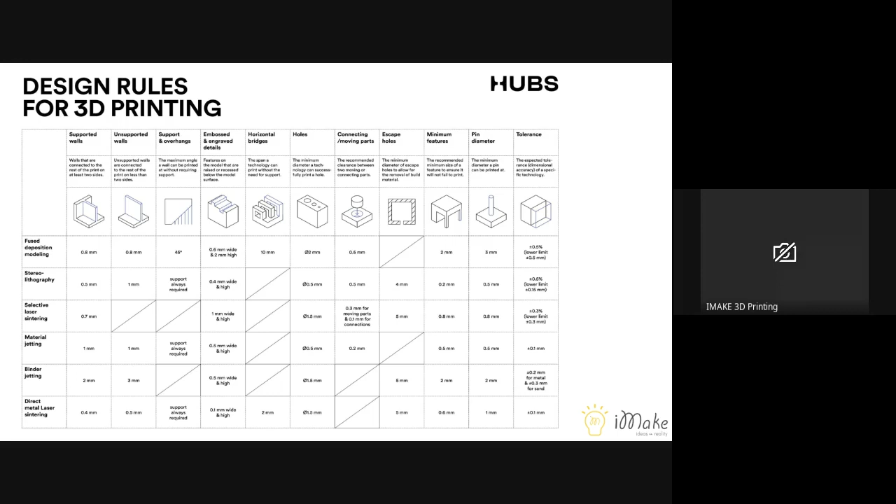Yeah, I think I'm done. Any questions, please? Yes, participants, any questions to Mr. Sudhir? Yeah, ma'am. No, I was just referring to the participants if they have any questions to you. Okay, sorry. Yes, please interact. Hello, sir.

Yeah, hi. Are you open to the idea of collaborating with engineering students on projects of mutual interest? Ma'am, I'm open, but the challenge I find with engineering students is their commitment, because we are a startup, a small team of 10 people. We need people with high commitment. We can teach people if they don't know, but if they don't have commitment, it delays everything and gives us a lot of frustration. So our experience has not been great with interns for this reason. One day they say their professor called, the next day they go to a movie, and the third day they say they want a certificate.

Yeah, I'm aware of that, but the kind of projects I'm talking about are where you collaborate with the faculty, and the faculty is responsible for the students. Oh, yeah. Then the answer is yes. Okay, sir. I'm a professor from an engineering college in Pune, and I'm interested in working on these projects. I'll be in touch with you, sir. Sure, ma'am. Here are my contact details. Yeah, I've taken that. Okay.